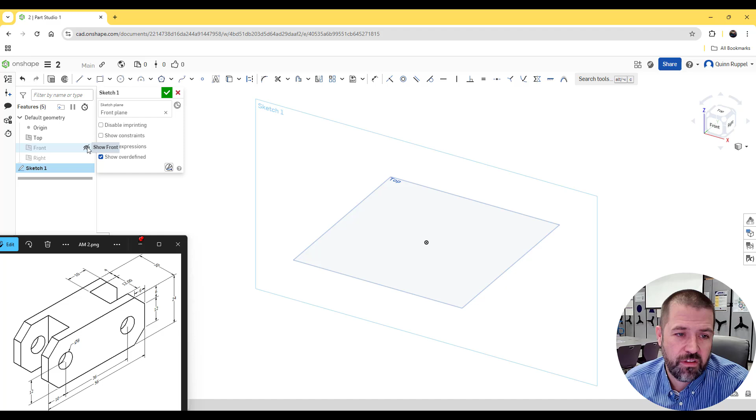I'm going to begin by clicking New Sketch on my front. Doesn't matter which one you start with. I generally like to start with my front. On the left hand side here it says top, front, right. I like to turn these 3 eyes off. And I'm ready to begin drawing.

There's many different ways of doing this. I'm going to do it by creating a rectangle first. So clicking on rectangle off my center point. This bottom number, my width, is 56. My height is 24. I'm going to zoom in, hit escape, and just drag these dimensions off.

I have 2 8mm circles. I am going to use the center point to my advantage. I know that this circle is lined up directly in the center, so if I start off at that center and kind of drag to the right, I know that I'm beginning on my center. 8mm. Same thing on this side.

But as we know, every circle needs 3 dimensions. I have my diameter there. I'm going to click on dimension and go from my bottom to my center, and just be sure that's 12. Same thing here, bottom to center. Again, be sure it's 12. It should be if you use that center point.

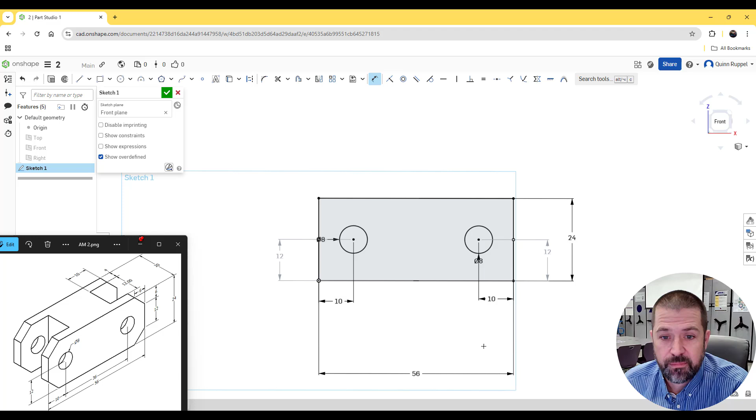Moving from my left to my center is 10. Left to center, 10. You'll notice that is now black. That's constrained. Right to center is also 10. Right? I'm going to hit Finish Sketch. I like to do my extrusions from the isometric view. I'm going to extrude. My width here is 20.

Alright, so we have 2 more steps. I need to create these chamfers as well as these cutouts. I'm going to do the chamfers first. Chamfer. Inside a chamfer I have 3 different options. I can go an equal distance, I can go 2 different distances, or I can go a distance and an angle. In this case I can see that I have 6 and 6.

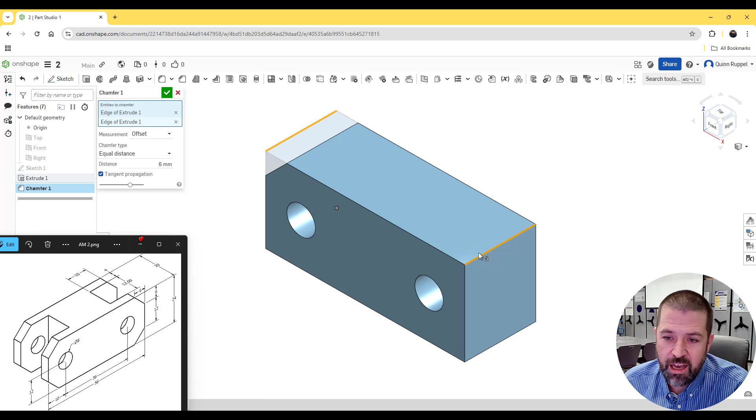So I'm going to switch this to the top to say equal distance. Switch my distance to a 6. And I'm going to click on, looks like all 4 corners. And hit my green check.

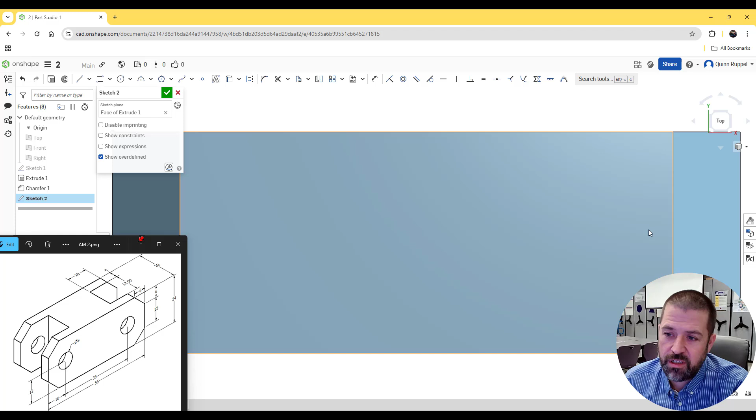Next up I'm going to create these cutouts. The cutouts are on top, so I'm going to do a new sketch on top. Again, I like to adjust my object to where the extrusion is going to be. I'm going to use a rectangle, and I'm actually going to make it oversized on both sides, extending out past my object. Alright, so I've got the rectangles made.

If I look at my blueprint here, from the back side to this inside edge is 4. So I'm clicking on dimension, the back side to this edge is 4. Back side to this edge is 4. You'll notice my object reduced in size. Anything that is blue is still modifiable, right? If I click on here and drag, I can readjust it. I then have a dimension in here that is 12.

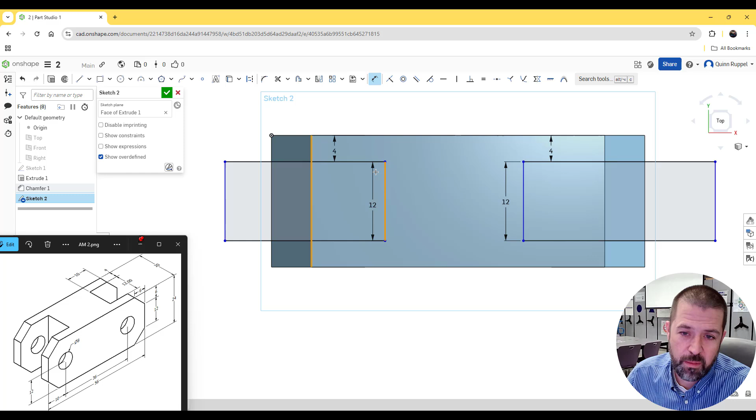And a dimension from that chamfer to the back end is 10. So here's my chamfer, here's my back end, that's 10. Here's my chamfer, here's that back end, and that's 10 as well. I hit my Finish Sketch.

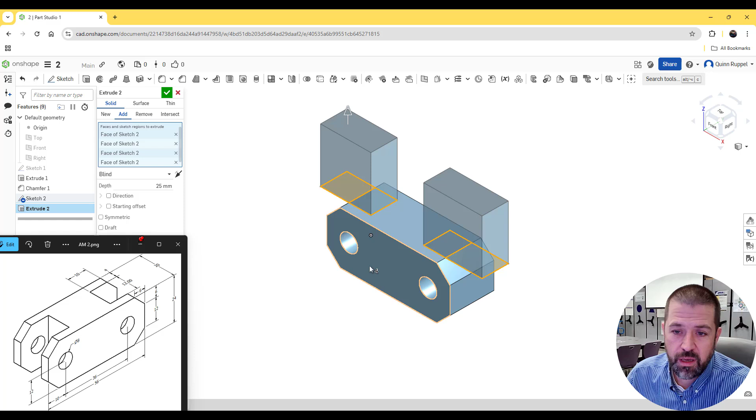Again, I like to do my extrusions from that isometric view. Click on Extrude, make sure I click on both of them. And rather than adding material, I want to switch it to remove so that it goes all the way through, and hit my green check. And there is more advanced modeling, part number 2.